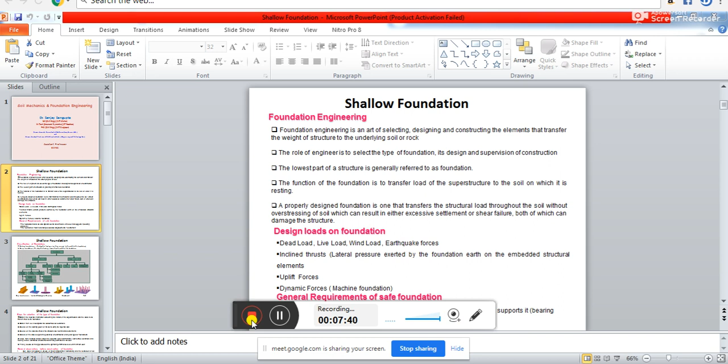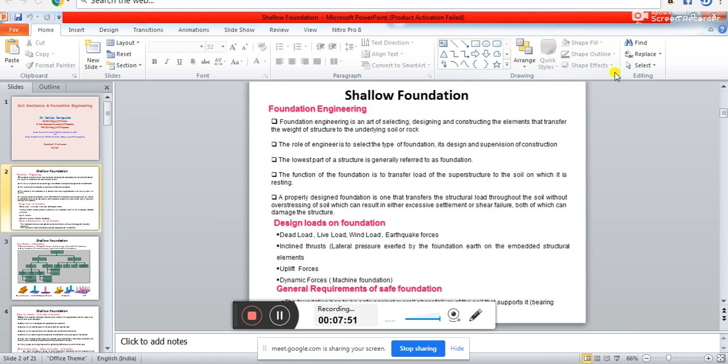So everyone can see the slide what I am sharing? Can everyone see? Yes, sir. Okay. So just a minute. This one, if I can draw. This recording thing is not going away from the screen. Anyway, you can see now, right?

So shallow foundation. So before getting into shallow foundation, let us discuss about foundation engineering. Now what is foundation engineering? First thing you try to understand. So you see, foundation engineering is nothing but an art of selecting. It is an art. The engineer will decide on foundation. So basically it is an art of selecting, designing and constructing the elements that transfer the weight of the structure to the underlying soil or rock.

So it is the job of the foundation engineer who will decide on which kind of foundation he will have to design. He will have to select which kind of foundation. Then he will have to design it, and then he will have to construct it. So all the three jobs need to be done by the foundation engineer. So that is very important. So foundation engineering is basically the concept.

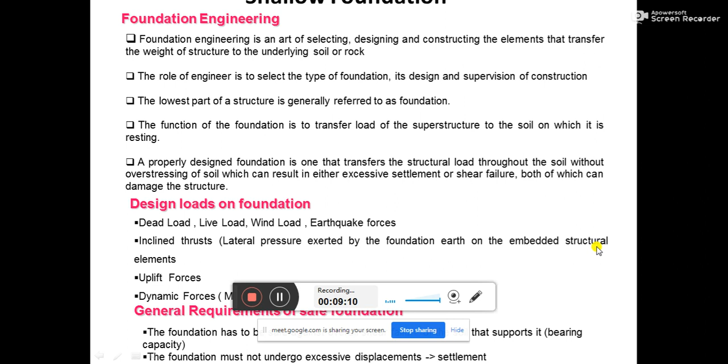It is a concept where you need to understand how do you select a foundation, how do you design a foundation, and how do you construct a foundation. All the three things are the requirement of a foundation engineer. A foundation engineer must know all these things.

The second thing is the role of a foundation engineer will be to select the type of foundation. This type of foundation is very important to understand: which type of foundation you will be applying for which kind of structure, which kind of soil, that you need to understand, and its design and the supervision of the construction.

All of you know that in most of the cases, the lowest part of the structure is generally referred as foundation. And the function of the foundation is nothing but to transfer the load of the superstructure to the soil. That means a foundation is sometimes termed as a substructure.

So, a substructure will be taking the load from the superstructure, and superstructure is nothing but your structure which you see outside the ground, and that superstructure will be transferring the load to the foundation, and in turn, through that substructure, the superstructure load will be transferred to the soil on which that substructure is resting. That is very important to understand.

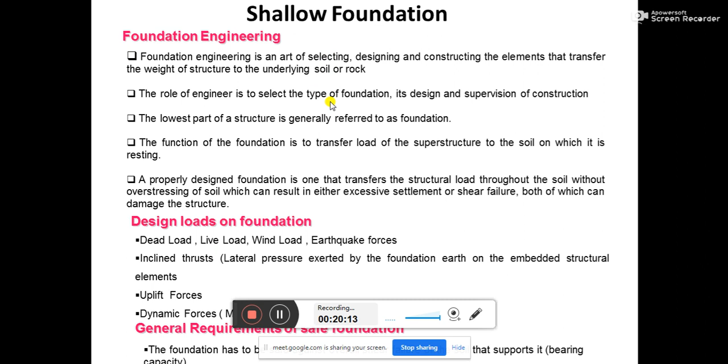Next is your dynamic forces, and dynamic forces are very important to understand. Dynamic forces are nothing but the forces coming from the machine foundation. Let's say you have constructed a building and on the ground floor level you are putting a lot of machinery, so the machinery, while it is running, will be creating a huge amount of vibration kind of force, that is actually dynamic force. So your foundation needs to be designed for those kinds of dynamic forces also.

So basically, if you consider the general requirement of any foundation, it needs to support the superstructure load, and ultimately that superstructure load needs to be transferred through the foundation to the soil level. And while transferring this load, you must be aware of two facts. That is the general requirement of a safe foundation, the two points we have already discussed: there should not be excessive settlement and there should not be excessive shear failure. You got it? There should not be excessive settlement and there should not be excessive shearing of the soil.

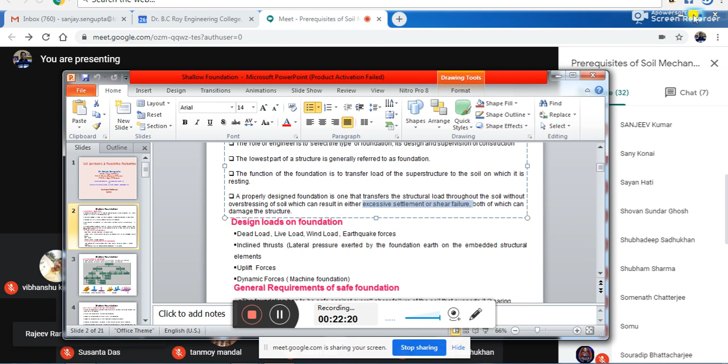So basically, while designing and selecting a foundation, you must be very cautious that you cannot allow the soil underneath the foundation to fail by shear failure. And failing by shear failure means, because of the load coming from the superstructure to the foundation level, the soil under the foundation should not be getting overstressed, such that the shear stress the soil can take is exceeded by the load coming from the superstructure to the substructure.

And the second thing is, the foundation, along with the control of shear failure, should not be settling excessively. Means if the foundation is safe in shear, then also you will have to ensure the foundation is not settling excessively. And for this settlement of foundation, you need to remember your previous semester course, soil mechanics, and consolidation settlement, where you learnt about immediate settlement, consolidation settlement, primary consolidation and secondary consolidation. We will discuss more in detail while discussing settlement of foundations.

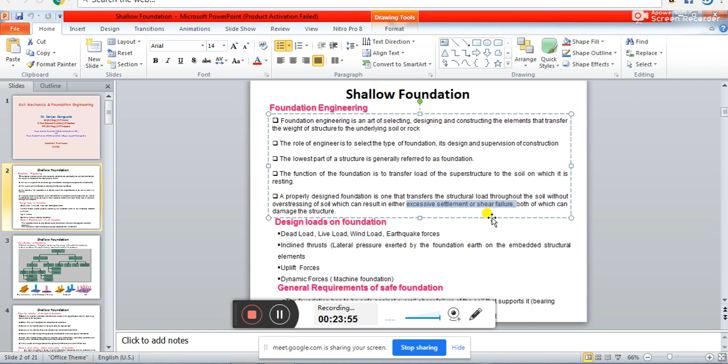Okay. Now going forward, let us go to the next slide. Now let us come to foundation, shallow foundation. First thing you should understand is the classification of foundation. How can we classify the foundation?

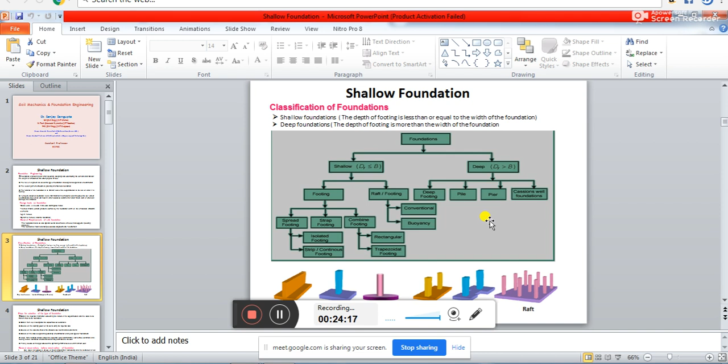All of you can see it, or should I make it larger? Sir, make it larger. Is it okay now? Yes, sir.

The classification of foundations: foundations can be broadly classified under two categories. One is called shallow foundation and the other one is called deep foundation.

Definition-wise, shallow foundation and deep foundation can be understood depending on the depth of the foundation. That means the bottom level of the foundation, at which depth from the ground level - that is the depth of the foundation, and the width of the foundation.

Every foundation will have two criteria: one is the width, that is the breadth of the foundation, and the length of the foundation. In most cases, while designing and analyzing the foundation, the primary criteria will be the breadth of the foundation, and this breadth will be taken as the criteria for deciding whether the foundation is shallow or deep.

If the depth of the footing is less than or equal to the width of the foundation, then the foundation will be called a shallow foundation. That means if the depth of the foundation is Df and the breadth of the foundation is B, then if Df is less than or equal to B, we will always call that kind of foundation a shallow foundation.

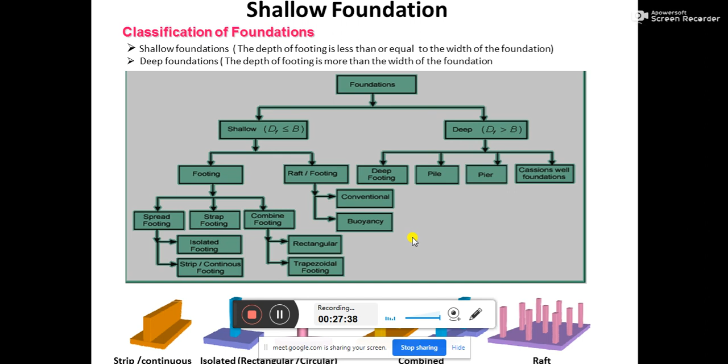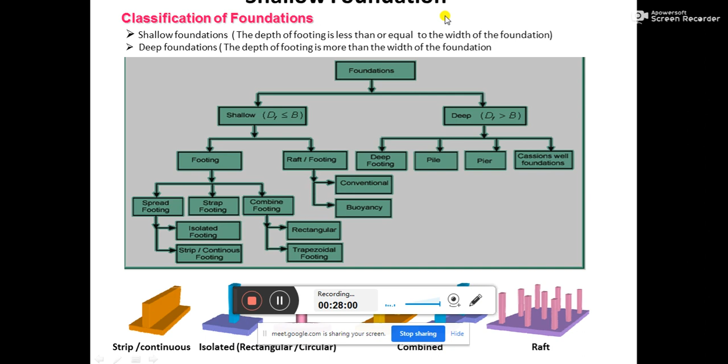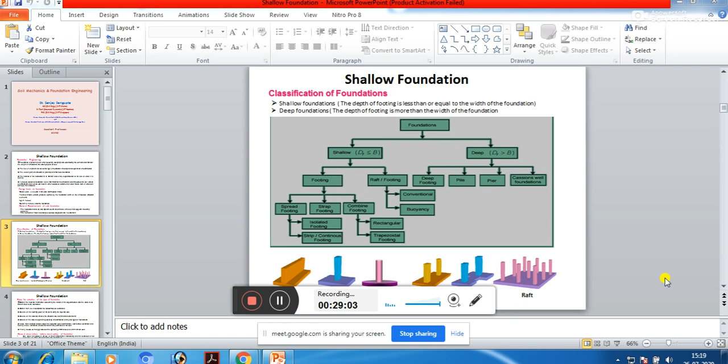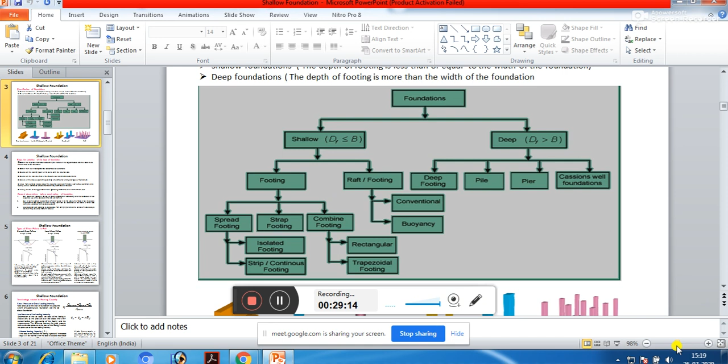Let us try to find out from the figure. You cannot see this figure, right, or can you see it? Not properly. The figures you cannot see, but this recording part you can see, right? One recording window is coming, yes. I am not able to understand why this is not going from the screen. Just give me a minute, let me see if I can remove it from here. This is coming at the top. Just a minute. Anyway, this is not going now, let me just share again. Now can you see the figures? Now can you see? So let's see, see the diagrams. I don't know why this is not going. Let me try, it's not going at all, it's coming to the next slide again. But if I just increase the size, will it go? Let me check. No. Now you can see it a little bit larger.

Yes, sir, yes. So see, footing - when we are talking about footing, we are telling about spread footing, strap footing, and combined footing.

So see, this is actually spread footing. Spread footing means which are basically spreading. This is your column - you can see this is your column. Just below that column, a footing is given which is spread across the total dimension of the column. So this kind of footing we will call spread footing. So this total thing is spread footing.

So you see, if you notice this spread footing, this is actually rectangular or square in nature. On the other hand, you see this spread footing here - this one is actually circular footing.

On the other hand, there is another spread footing on which a continuous wall is going, and underneath that there is a footing. This kind of footing we call strip footing or continuous footing. So basically, footing means a shallow foundation.

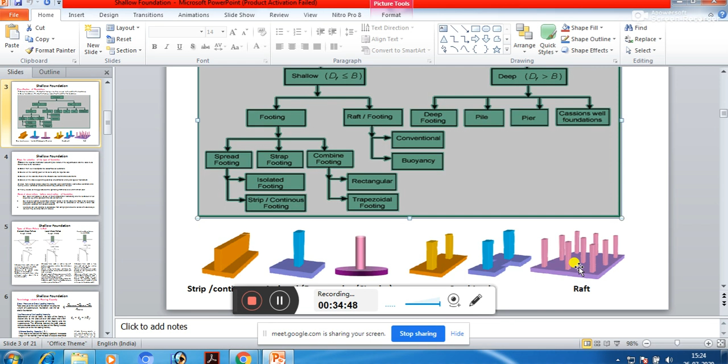Now coming to deep foundation. Deep foundation is a foundation where the depth of the foundation is more than the breadth of the foundation. This deep foundation can again be categorized under various types: deep footing, pile foundation, pier foundation, caisson, and well foundation. We will get into the details of these at a later stage.

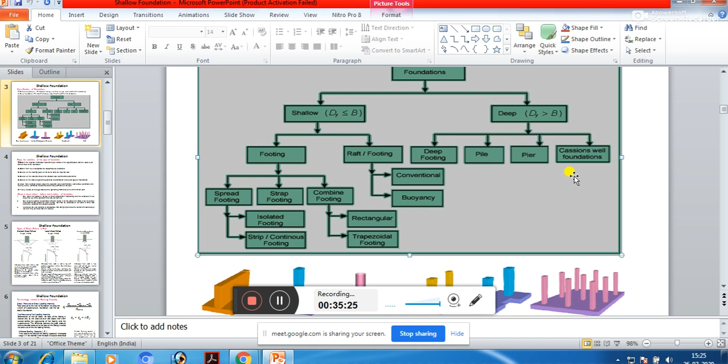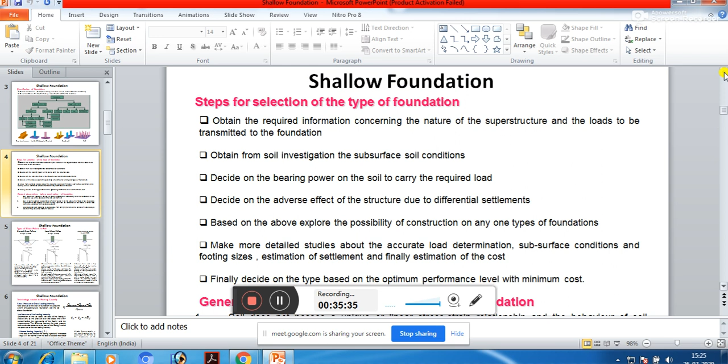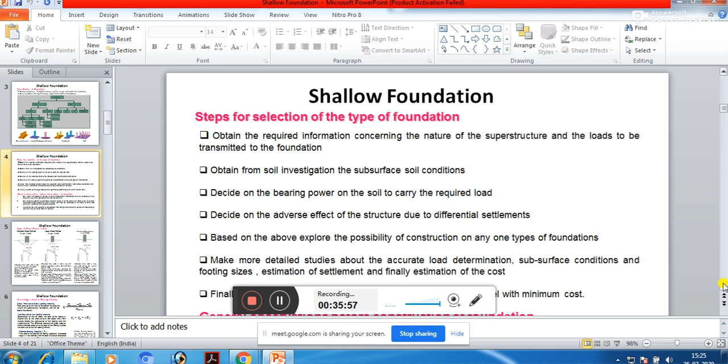Now see the next slide. See how do you select a foundation? What are the different steps you need to carry out for selecting a foundation? Here is the point where you need to understand that soil mechanics and foundation engineering are correlated, because if you do not know soil mechanics, you will not be able to do foundation engineering.

So, steps for selecting foundation type: if you want to select which kind of foundation you will be selecting, the first thing you need to know is to obtain the required information concerning the nature of the superstructure.

First thing, for designing or selecting any foundation, you need to know what superstructure that foundation needs to support, whether it will be supporting a 10-story building, 3-story building, or 5-story building. That you need to know beforehand, otherwise how do you understand how much load will come from the superstructure to the foundation? So the first information concerning the selection of any foundation is the nature of the superstructure and how the load from the superstructure will be getting transmitted to the foundation.

See, a simple two-storied building which will be used for residential purpose, and one which will be used for some machine installation like a lathe or some different kinds of machines, the requirement of foundations will be different. You must understand that. Because when a two-storied building is used for residential purpose, the load requirement coming from the superstructure to the substructure will be different than when different machines are placed on the same two-story structure at two floor levels. Because of placing the machines, there will be vibrations coming onto the foundation, there will be dynamic load coming onto the foundation. So your design criteria, your selection criteria, your type of foundation may differ for the same two-storied building depending on the usage of the building. You should be very, very careful about it.

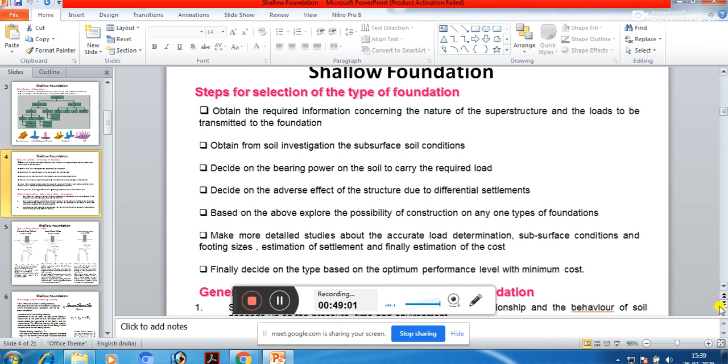Okay, then finally you decide on the type based on the optimum performance level with minimum cost. That is what I was telling you, that you will have to do it with maximum performance level. Every client will want performance to be maximum and cost to be minimum. So with minimum cost and maximum performance you must do your designing.

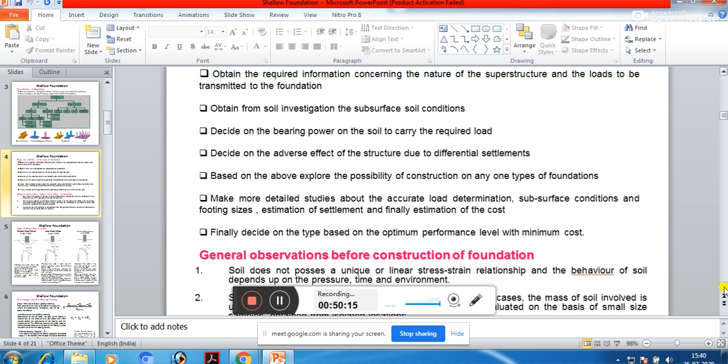Okay, so basically, see the general observations you need to make before any foundation construction. There are two observations you must make. Soil does not possess a unique or linear stress-strain relationship. If you remember the soil stress-strain behavior from when you studied shear strength of soil in your 4th semester course, the stress versus strain curve of soil is not like mild steel, it is something different. It does not follow a unique or linear stress-strain relationship. So you need to cautiously understand the stress-strain characteristics of soil, and then, depending on the time, environment and behavior of the soil, construct your foundation.

Okay. Now next is soil at every location. The soil at every location is essentially different. That is what I was telling you just 2 minutes back, that you cannot say that

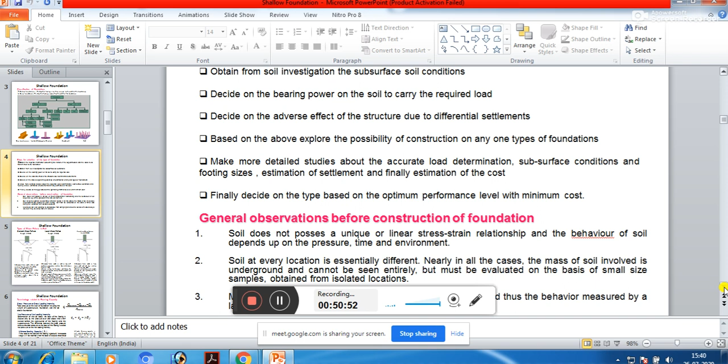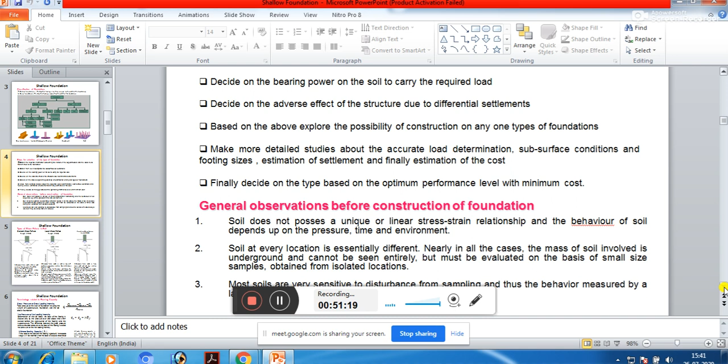No, it may not be the case. Soil at every location is essentially different. In nearly all cases, the mass of soil involved is underground and cannot be seen entirely. You cannot see the soil; you don't know what is there underground. See, just 500 meters away you may get a rocky stratum, but where you are constructing your foundation you may not have such a rocky stratum. So you cannot decide on the foundation you are constructing at one location based on that foundation.

And the last thing is that most soils are very sensitive to disturbance from sampling, and thus the behavior measured by a lab test may be unlike that of the in situ soil. This is very important. What does it mean? When you collect the soil sample, you should be very cautious, because while collecting the sample itself, the soil strength parameters get a little bit disturbed. So either you take care of the disturbance, or you take the help of some in situ testing. In situ means you test it at the site only.

Okay. So you have learned about the standard penetration test in your 4th semester course. Standard penetration test, anyone? Hello. Yes, sir, a little bit.

A little bit. Okay. So the standard penetration test is a kind of in situ test. Without collecting the sample, it gives some idea about the soil from the driving of the hammer. So in situ soil sampling and collecting should be done very cautiously. Otherwise, soil is such a sensitive material.

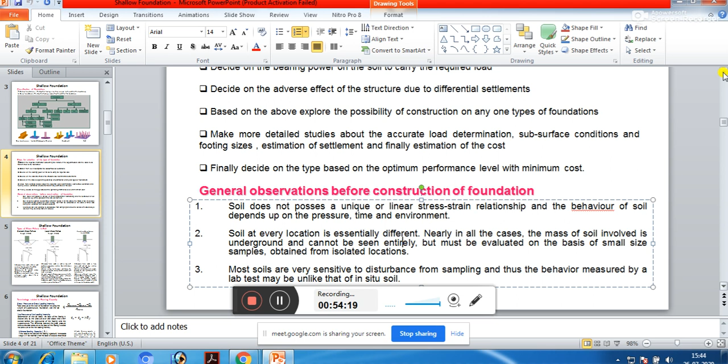And the two most important criteria I have explained: for any foundation design or any foundation selection, you will have to consider the subsurface soil condition, you will have to consider the superstructure load which is coming from the superstructure to the substructure, and third, you will have to consider the two most important criteria of any foundation design, that is the condition of shear failure of the soil and the condition of excessive settlement of soil.

So with this I stop today, and in the next class we will be moving forward and we will be discussing more about the shallow foundation and how the shallow foundation basically fails in shear. You can see this slide. There are different types of failure in the soil of shallow foundation. We will be discussing them in our next class tomorrow.

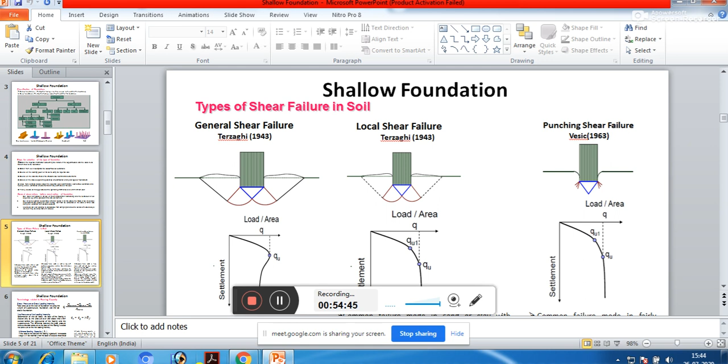Okay. So is it okay? So if you have any question, you can ask. Yes, sir. Okay. So anything?

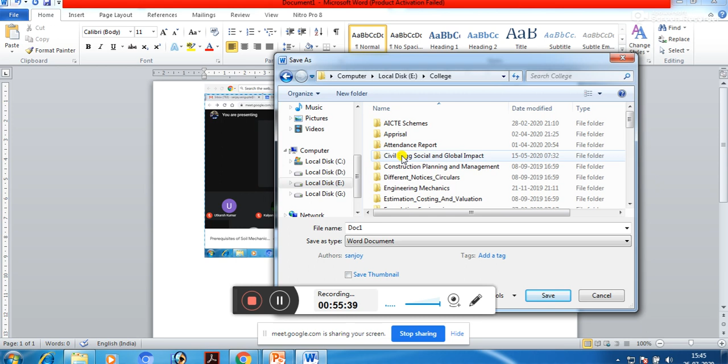Books I will suggest tomorrow. Okay, I'll give you some books, and we'll try to find out some e-books for you which you can refer to. Because in this situation the problem is you cannot just go and buy books also, right? So we'll have to go for some e-books kind of thing.

Now you just follow these lecture notes, because till now we have not started with the main course. The main course will be starting a little later. Now you just go through whatever classes are being done, you just follow those. Okay, and books, let us try to find out.

Who is this Utkarsh Kumar Datta? Why is he trying to come? I don't know. Hello, sir. What is inclined?

Sir, what will inclined thrust be? Inclined thrust. See, inclined thrust means, suppose you are putting a foundation. Let me give an example. Have you observed the construction of any kind of drain? Look at it: while constructing a drain, when the concreting is being done,